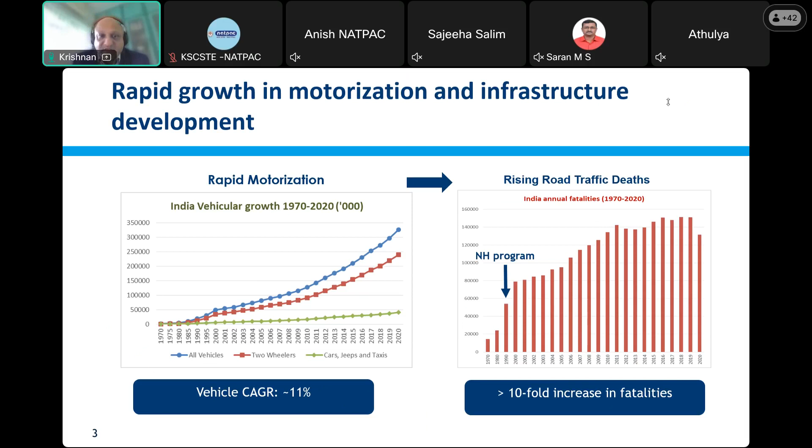Next, who, where, and why are these fatalities happening? Who are these victims, where are they, and why is it happening? We already talked about the why and who a bit. Almost 50%, almost half, are motorcyclists, about a fifth are pedestrians, and the rest, about 7%, are cyclists and three-wheeler riders.

Why? Primarily because our roads aren't built to cater to all road users—we design mainly for motorized transportation and not for other road users, causing these interactions, risks, and crashes. According to the Road Accident Report 2022, speeding is a big factor—more than 70% of fatalities happen due to speeding. And as I said earlier, two-thirds of victims are also in the productive age group of 18 to 45.

Many may not be aware that more than 4,000 fatalities on average are happening in our construction work zones per year, not crashes, fatalities. If you think about it, that's equivalent to about 10 jumbo jets crashing in a year in terms of fatalities.

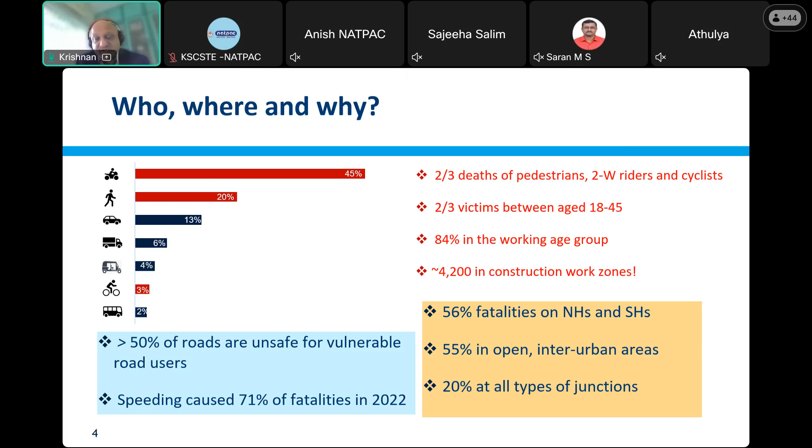With this kind of statistics, we need to think about road safety more as a system management challenge. It's not something you can do by doing one thing or another, but a complete system where you look at 5 major aspects: roads, users, the speeds they are subject to and what speeds are mandated on the roads, the types of vehicles let onto the roads, and the type of post-crash management in case of an incident.

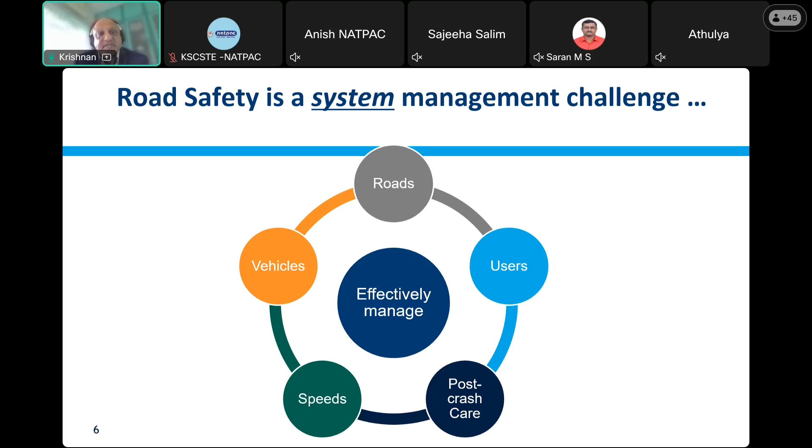All of these have to be effectively managed to deliver road safety. Unless all of these are taken systematically and done in a comprehensive manner, we cannot expect to reduce our road fatalities in the near future in a significant manner.

One of the good frameworks, which most advanced countries have followed and which has been pioneered by Tony Bliss and Jeanne Breen, requires a certain institutional setup with a very focused, mission-based approach to road safety—almost like a mission to space—where you say, look, I have 400 fatalities a day, and I'm going to reduce them to, let's say, 100 over the next 10 years.

So you need to have a results focus, and then you need interventions that will support that results focus in terms of three major areas out of the 5 that I showed earlier.

One is planning, design, operation, and use of roads. Then how do you control both users and vehicles in terms of their licensing and the roadworthiness of vehicles? And how do you account for post-crash care—how do you have a good system of recovery and rehabilitation of victims?

These will ultimately deliver results in terms of outputs—better roads, better drivers, better vehicles—and in terms of outcomes, both intermediate, such as increasing helmet wearing, or increasing the number of people following the speed limit or wearing seat belts, up to your final outcomes of reducing fatalities to whatever target you've set.

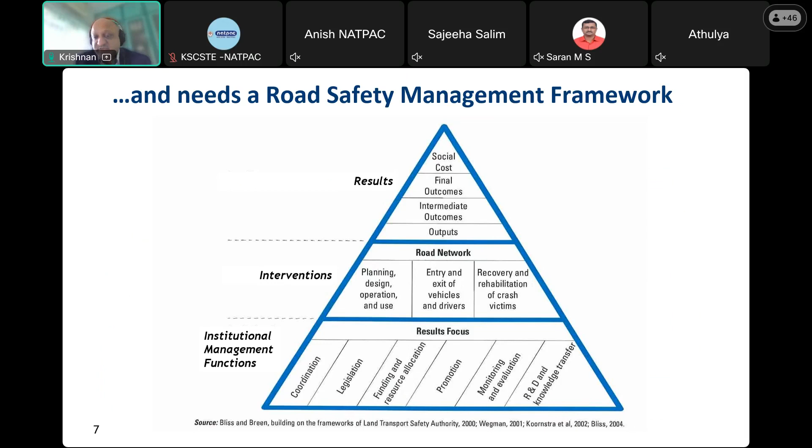So the rest of the presentation will dwell on how we are doing. If you can see on the top right, there will always be a kind of a pointer on where we are in terms of what I'm discussing.

If we look at the road network in terms of where we stand on aspects such as road planning and design, vehicles and drivers—on road planning and design, we have sound systems, very good engineers, more than 150 years of engineering experience, and very good standards and guidelines produced by IRC and NHAI and others. But there is little to no capacity for incorporating safety in planning or prioritization of roadworks.

For instance, to give a simple example, supposing there are two roads that are equally bad in terms of road condition, the road that has more fatalities should probably be taken up first for improvement. Whereas that kind of input is not currently there in our road planning and prioritization of roadworks. That should be the criteria guiding how we prioritize and plan roadworks.

That kind of connection between your road crash database and your road asset management systems, or the systems which let you prioritize roads for improvement, simply is not there. And highway standards are again tailored mostly for the safety of motorized transport, with very little for the safety of all road users.

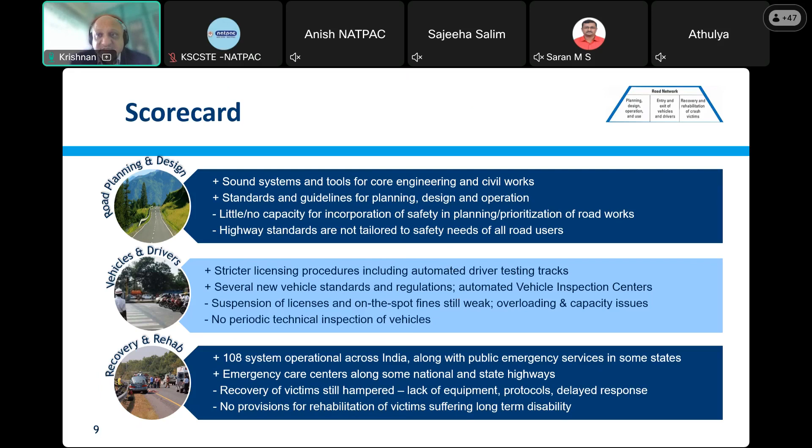So this is the scorecard in terms of the road network features, the entry and exit of vehicles, and post-crash care.

So what are some of the good things we can see in terms of institutional management functions? On coordination, there are national, state, and district road safety councils in place. Some state transport departments and cities, such as Chennai, have just started a road safety cell. State transport departments in Karnataka have a road safety cell, and I think Kerala also has one. Several states now have road safety cells.

Then on motor vehicles, in terms of legislation, the MVAA is there. There are also independent road safety authorities in Gujarat and Kerala. In terms of resources, funds are available for road safety and post-crash equipment by the ministry. Several states also have set up dedicated road safety funds from which projects are allocated funds for road safety activities.

Promotion is something that has actually been taken up seriously by every state and city, and even at the national level. Road safety weeks have been there, and road safety months have started from 2021. Several NGOs and corporates are involved in these kinds of campaigns.

On monitoring, the Supreme Court-appointed committee on road safety has been doing some of this in every state, looking at the number of fatalities that have been happening and the activities states have been doing. The integrated road accident database, IRAD, has also been set up. NHAI also had set up a rating system for highways which included road safety as a big aspect. IRAD should be a game changer if fully implemented, and it will help devise data-driven strategies and policies in every state. Research is also being done by several institutions, including NATPAC and other academic institutions.

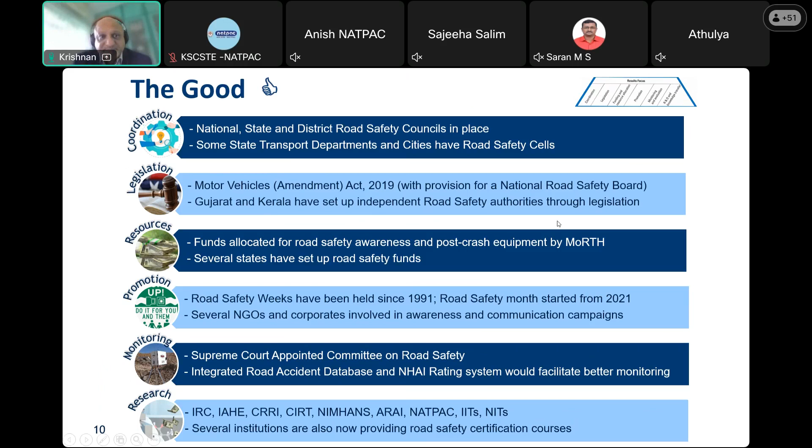But there are some areas for improvement. Specifically, if you look at the coordination issue, road safety councils lack a mandate, they lack resources, they lack capacity. Several state and district levels do not even know how to make a targeted action plan or proposals in terms of what to do about safety in a systematic manner.

On legislation, the Motor Vehicle Amendment Act is yet to be fully implemented in all the states. And in terms of having dedicated counterparts for the National Road Safety Board, very few states have dedicated agencies. Like I mentioned, Gujarat and Kerala have been pioneers in setting up road safety authorities, but other states are yet to follow.

Recently, though, Rajasthan has become the first state to actually have a 10-year strategy and action plan, which is also very good.

Resources, again, this is a constraint. Dedicated funds are not there for road safety improvements. There is no, and very importantly, even if the funds are there, the allocation of these funds for road safety projects is very, very weak. There is no kind of accountability of, okay, I gave you X amount for road safety last year. What happened to those funds? How have you actually looked at those districts or those jurisdictions? How have they done? Whether the fatalities have gone down, injuries have gone down, and what did they do? There is no mechanism to look at that and to kind of say, okay, now we can scale this up to the entire state, or we can have this as a best practice.

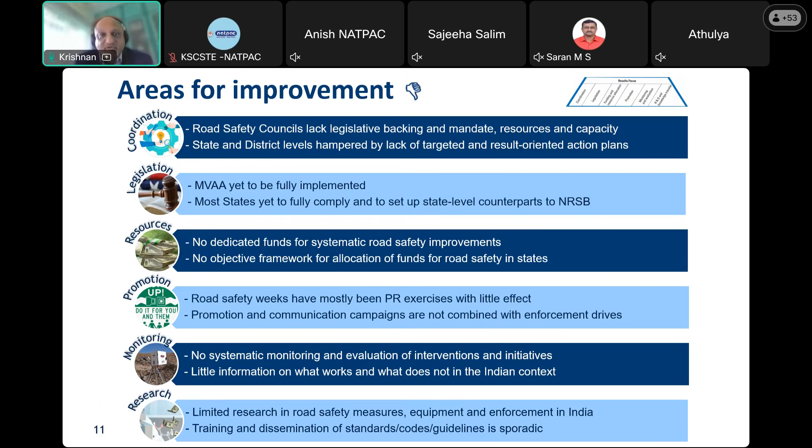So given that, what are some of the good examples, and how do we go about having good practices in road planning and design? Before we do the design, there are several prerequisites that we need to be looking at. So what are some of the climate risks in the area that you're planning the road in? What are some of the safety risks, proactively?

This can be done through several methods, including the International Road Assessment Program star rating mechanism of roads, which proactively gives you what is the risk on the road for different types of road users. And then the iRAP, if complemented with a road safety audit at certain areas where there is high risk, that needs to go in. Then these need to be supplemented and complemented by crash data on those segments, along with the crash data being integrated with your road asset management system data.

All these will then result in what are the standards that I need to use, and those standards will go into my design. So unless we do road design and planning in such a systematic manner, we are going to be seeing the same kinds of design and planning happening, which is a motorized vehicle mindset rather than a moving people kind of mindset on our highways, on our roads.

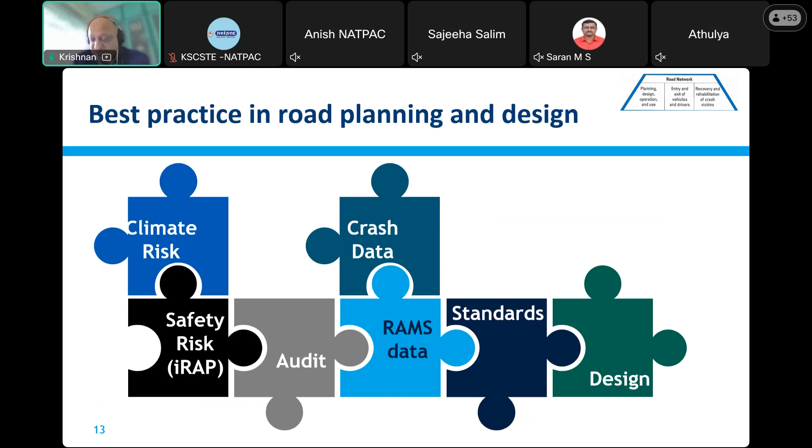So with that, let me quickly go to the two aspects that we as engineers can be looking at. What can engineers control among all the three big items in terms of the road environment? There are the road infrastructure, there are the users, and there are the vehicles. Out of these, I posit that the only thing we cannot control is users, because user behavior is something that is very much driven by human whims and fancies. Vehicles, again, is not in the control of the engineers, the engineers who are in the public works departments and who design our highways. So the only thing that we can focus on, that we can do well, is road infrastructure.

So we should be designing our road infrastructure in such a way that the available behavior, that means the behavior that is available to the users, is actually the right behavior. With that, what I mean is, let us take a very simple example.

This is a very basic example, but on several of our roads in the cities, when you put a speed breaker, there's a little bit of a gap between the speed breaker and the curb, for water to go through. But most two-wheelers and some four-wheelers try to avoid the speed breaker by taking that gap.

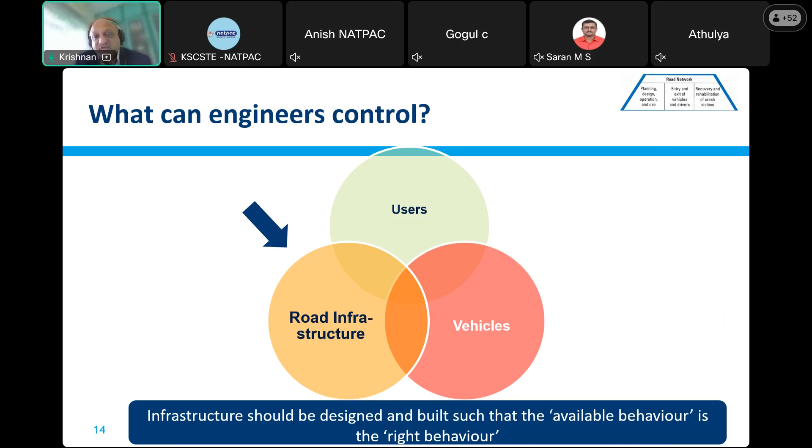It has been shown that even in advanced countries - let's take Australia, by the Australian Road Research Board - that they found with just infrastructure design improvements: the left portion of the graph shows a normal designed road, and the right portion shows a safe system designed road. You can see that your percentage reduction in fatalities goes from just 20% in normal design to 50% in a safe system design.

That is not in developing countries - this is actually even in advanced countries, they found this is an issue. And of course, if you add better enforcement, better vehicles, and better post-crash care, you're going to improve that even further, maybe much higher, like other countries have done, such as Sweden and Australia, New Zealand, how they've gone up to more than 50% reduction.

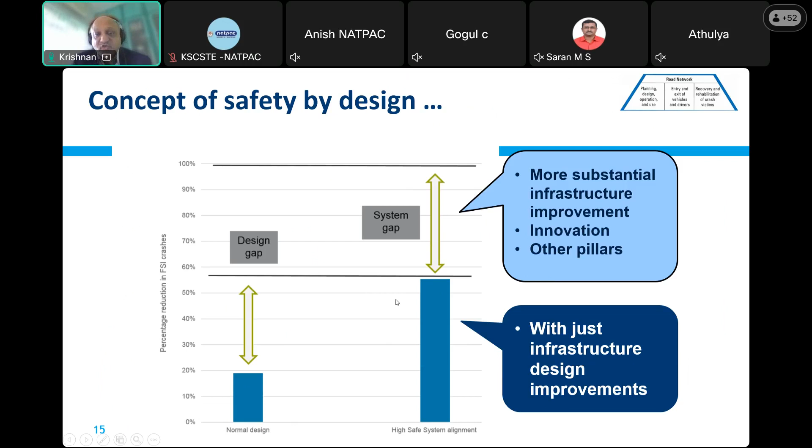So this is something doable. We need to have good design to avoid things like this.

This is a road, NH8 bypass, which has actually severed a local road near Jaipur. Look at the cyclists and the people who are crossing. This road has been cut in half by NH8, and because they don't have any access, they're actually forced to cross the road. With a high speed NH8, you can imagine the kind of fatalities that are going to happen on this road. This is basically due to faulty design.

So what is required from the roads perspective? From what I have seen, we need to have better standards, and we need to update these standards to incorporate road safety requirements into the design of our highways and urban roads.

We need to recategorize our road types in terms of link and place functions. How people are using the road in India is very much different from how they use it in the US and Australia. And we need to think about those and set safe speed limits on our roads.

Similarly, we need to have uniform performance metrics and policies on road projects, and how we actually measure performance of highways. It needs to incorporate a big safety component.

We need to have a big time capacity building program. Right now, I can tell you that for a country like India, we need about 20,000 road safety auditors. We probably don't even have 500 - even 500 is a stretch, I think, right now. We have probably the second largest road network in the world, but we do not have the kind of people who can audit those roads and tell you what is wrong.

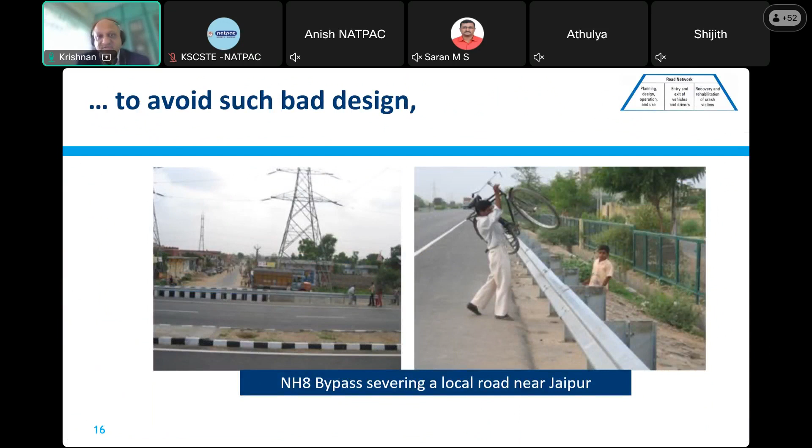So here, the design of roads I was talking about - to avoid this kind of design, or look at this kind of design. This NH44 in Telangana state, this is called the highway of death.

This road - you can see this small village path meeting this road from the left - and this village has lost all its 37 male occupants because of hit and run crashes while they were crossing to reach the village administration on the other side. The residences are on one side and the administration on the other side. There is one widower, because his wife walked across and got killed while crossing this road. This is the kind of design that we should not be doing.

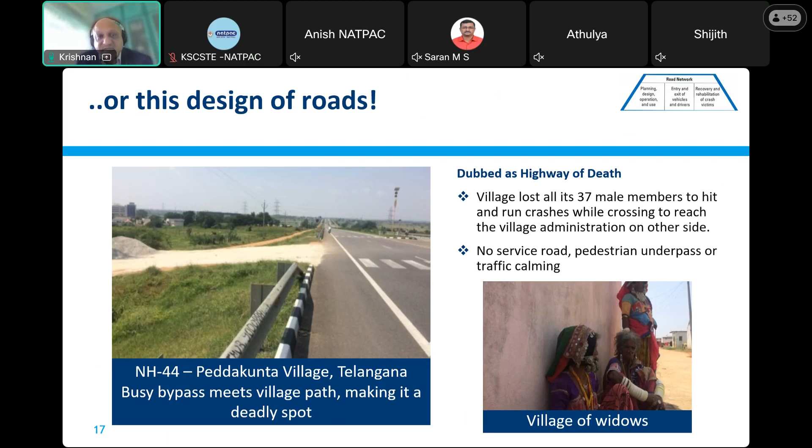We should be providing pedestrian underpasses, ways for people to cross to the other side. We need to think about basic things when building highways, rather than just thinking about intercity traffic or looking at it from end to end. We have to be looking at what communities and villages are affected, and this is not happening in a comprehensive manner in our country right now.

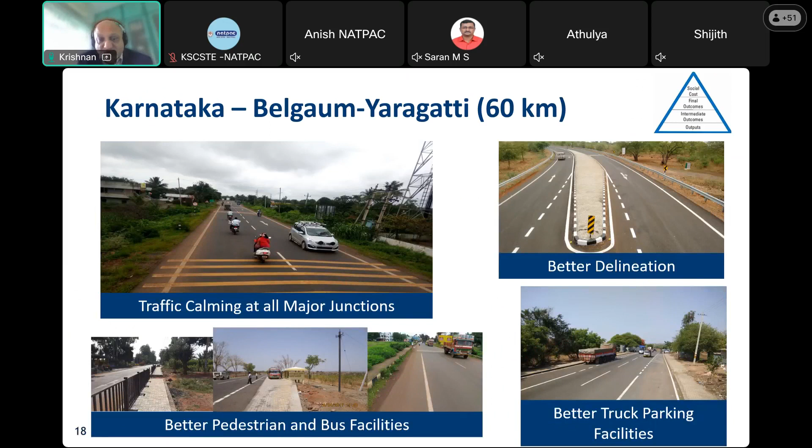Some good examples are from some of our World Bank projects in Karnataka. You can see it's a very simple 2-lane highway, but traffic calming has been given at major junctions. Better delineation is there. There are better pedestrian and bus facilities, and better truck parking facilities. All these need to be thought about when roads are being designed and implemented.

This has reduced crashes by more than 50% on this highway in Karnataka between 2015 and 2018. So this is a success story.

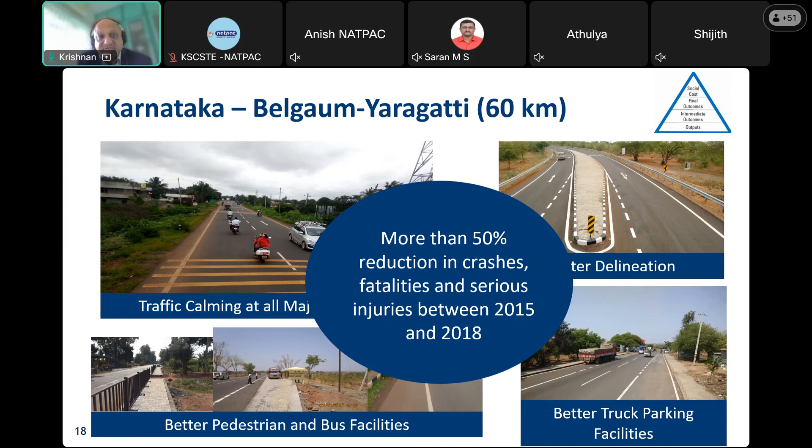Similarly, on the Kerala State Transport Project, several innovations have happened. You can see, for the first time, the zigzag kind of marking, which is to alert users and drivers that they are entering an area with a lot of crossings. Also very interesting, on the top left you will see the marking on the road going from slow to stop, and this is actually taken from AASHTO, not IRC standard - they've gone beyond and implemented something from AASHTO, which is very good to see.

This is another point I wanted to make - what is happening is our IRC guidelines and codes are taken as the gospel, as something we cannot go beyond, but that is untrue, that is not correct. What the IRC code says are the minimum that should be done. You can always go beyond the codes if something is better done in another code, like an Australian code, or US AASHTO, or the UK code.

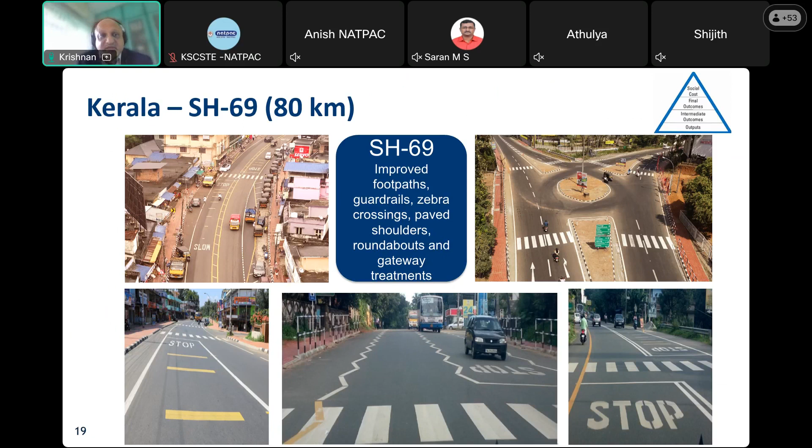Then we should be adapting and taking those, like Kerala has done. This is really good to see on some of our projects. Tamil Nadu again has done a very good job on some of the highways - you can see very good bus stops with even access for wheelchair users.

Very interestingly, in Tamil Nadu, it was in the contract that the contractor, whenever they did the highway, also had to improve up to 100 meters of the minor road in terms of safety and all the features. You can see that in the third photograph on the bottom.

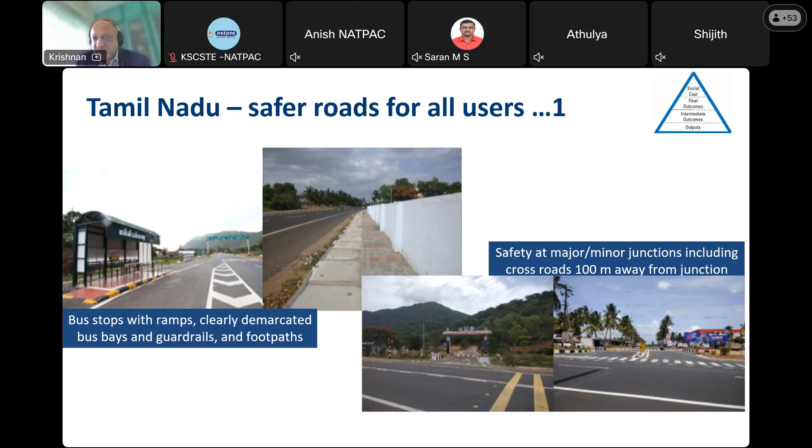So, safety at major junctions, you can see some of this. Again, this is more pictures from Tamil Nadu in terms of proper safety treatment at highway sections in built-up areas.

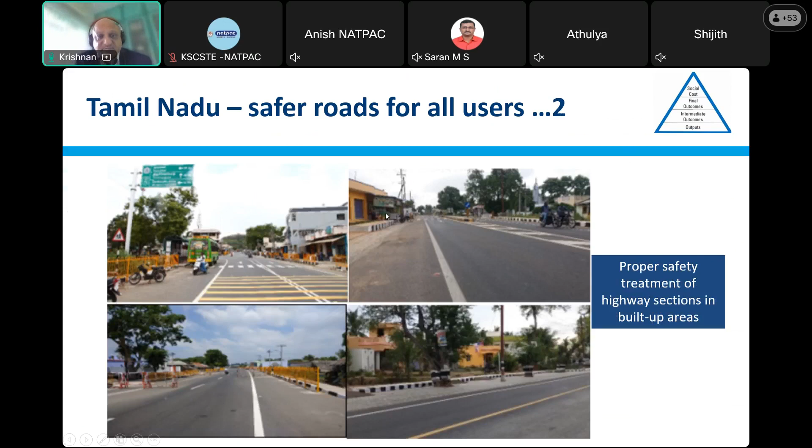Again, some raised pavement markers, center and edge lines, and interestingly, hazard markers and chevron signs. But these edge markers are something rarely seen on our roads, and I think we need to look at having an audible alert for drivers, so that when they get too close to the edge, especially on hilly roads or in Kerala where there are mostly 2-lane highways, we need to look at this.

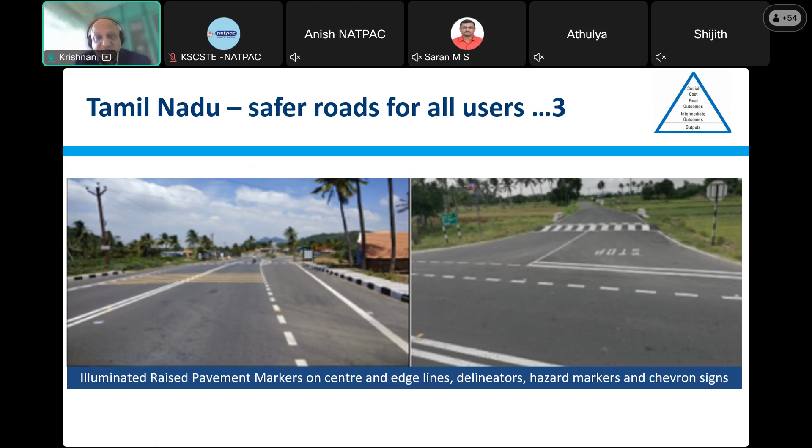Here, protection of any kind of hazard or road safety feature, whether it's a signal, a signpost, or anything, it has to be protected from the road by a crash barrier. It should be behind the crash barrier. So, very well done here, again in Tamil Nadu.

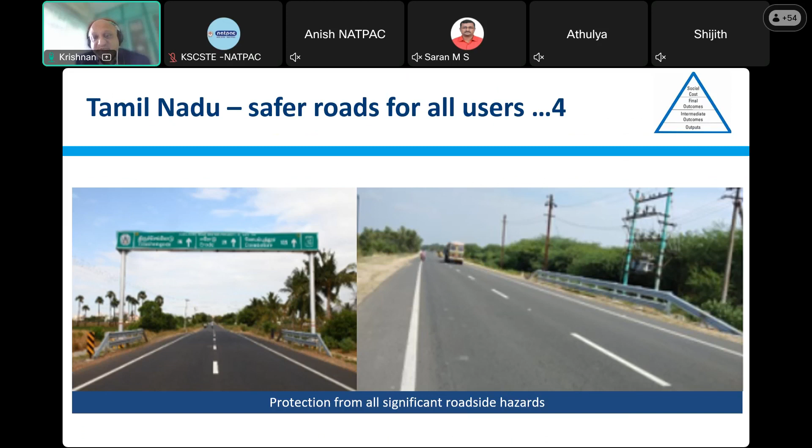Punjab is one of the best things we've seen, and this is quite old, but what they started very early was a consistent application of standard layouts and treatments, which is very important, because as a driver you don't want to see any surprises. Driving is already a tough proposition on our roads, and with that you don't want to see different kinds of layouts and treatments.

So you can see rumble strips, and one of the things I would say is look at our speed breakers. I think we are not consistently applying these speed breakers, and that is why a lot of communities are against them.

But if you actually look at the IRC code, there are very good guidelines on what speed, what height the speed breaker should be, what the geometric features and slope should be. Everything is given, but we are not doing those according to the guidelines. So no community wants to see speed breakers, with the result that you're exposing a lot of non-motorized road users and pedestrians to high speeds and high risks.

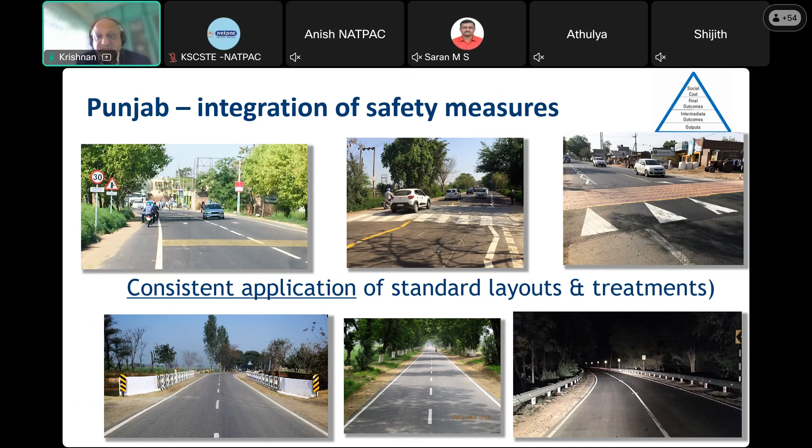So finally, I wanted to come to, very importantly, work zone safety, which is very close to my heart, because this is something where there is purely negligence. 4,000 fatalities happen in our country only because of work zone safety. This is unacceptable, and we need to be looking at this.

And this is completely in the control of the highway agencies, because they can pull up the contractor, they can pull up the authority engineer, and actually impose penalties when some of this stuff is not happening. So what is happening on work zone safety? The compliance to the codes is there only in letter and not in spirit.

I have seen several roads under construction in my experience in India, and there are very few advance warnings of road closures. What is the length of road under construction? What is the alternate route? Signage is completely inconsistent, not as per standard, confusing the road user. The advance warning signs at most places are just placed right before the work that is happening.

I can show you some examples of how this is done well, even in India, in some places where they're trying, which is very nice. But 95% of the time, this is not being done.

Hard crash barriers are missing, and this is basic. You don't need to be a civil engineer to know that you need to put hard crash barriers on several valley side sections of roads, and this is causing a lot of fatalities on our hill roads.

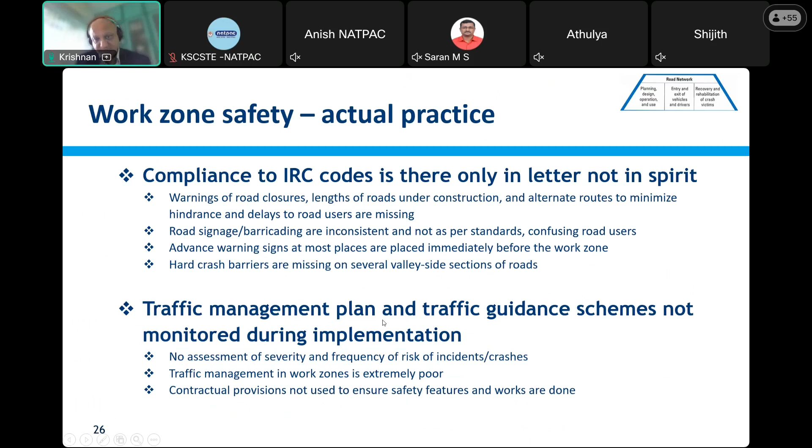And I can show you some of the pictures. On the left you can see what the standards are, on the right what is practice, and the sign is placed just before the hazard. This is the case everywhere.

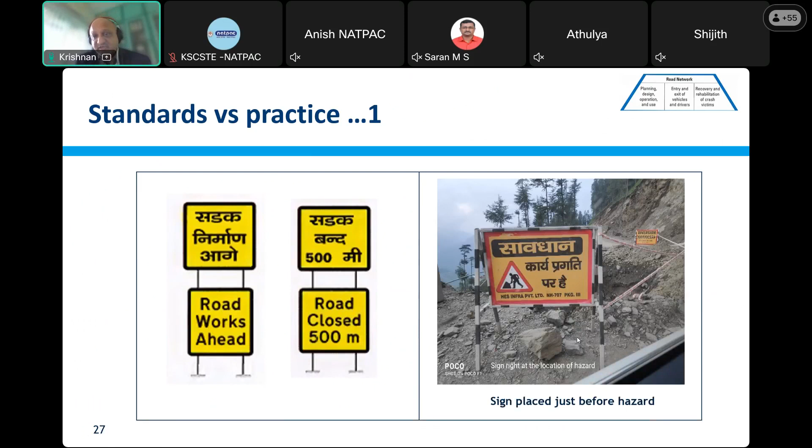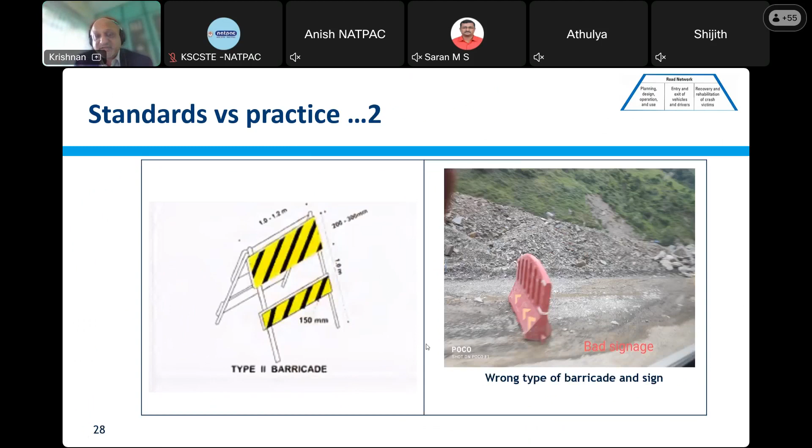Next, you see the kind of barricade that we need to have, and the kind of barricade that we are having, with poor signage. This is placed where somebody could fall. Imagine you're going at night and suddenly you come across this - it's going to cause an incident right there.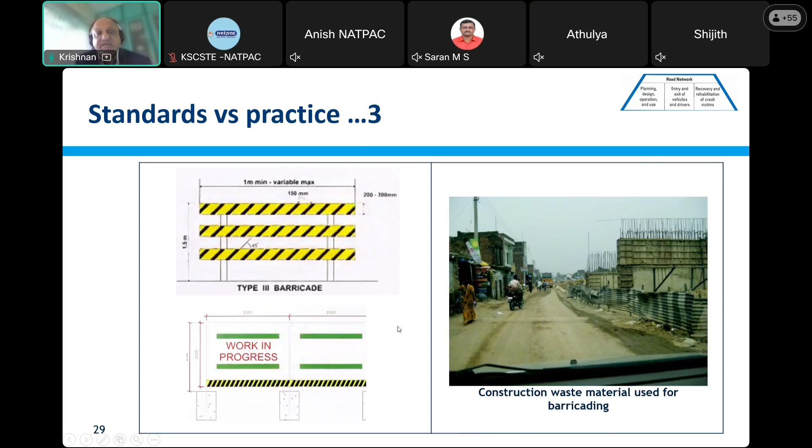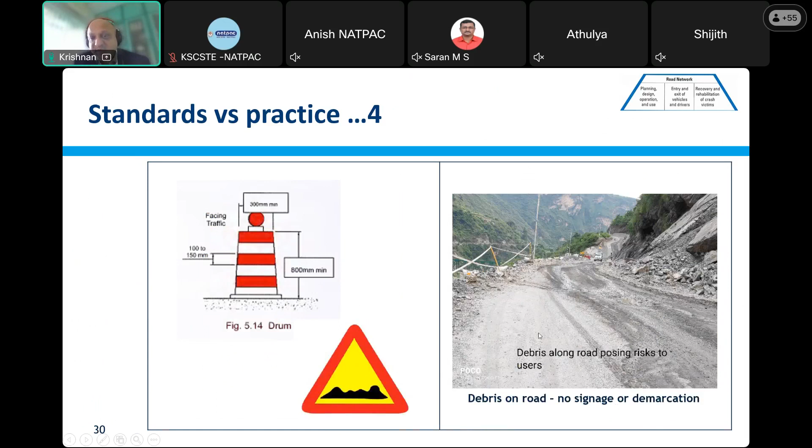Similarly, in terms of barricades, we all use some kind of jugaad material, waste material used for barricading. But what is actually recommended is very clearly given in IRC. Again, there's no signage or demarcation of what is happening in terms of work zone, and debris on the road - construction debris - which is going to make your vehicle skid, and look at the protection on the valley side. So again, water-filled barricades are given in the IRC code.

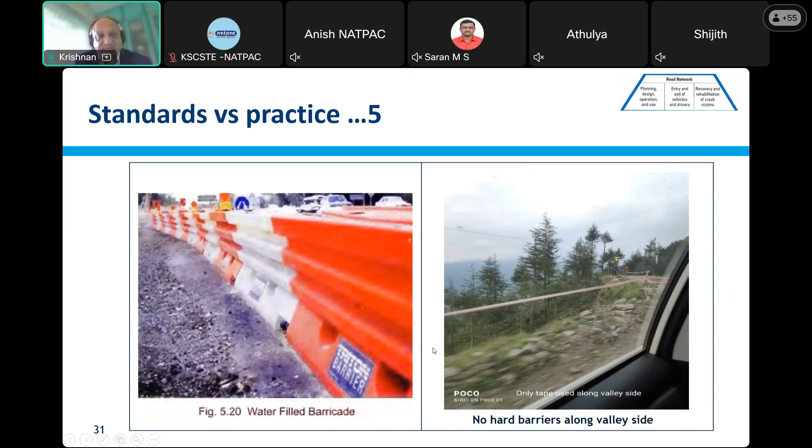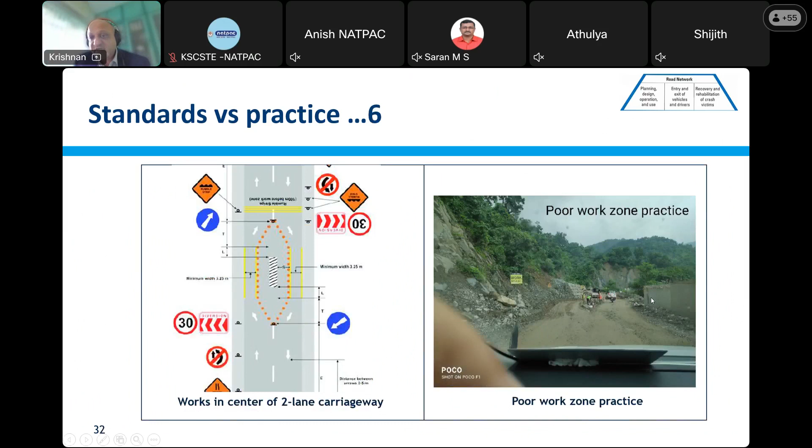No hard barriers, like I said. This kind of traffic management plan is given in the IRC for works happening in the center of the carriageway, and look at what is happening on the right in terms of actual practice.

So what is required is you need to look at the risk in terms of what is the frequency of a crash that is happening, and what is the severity of that crash. Unless you look at these two aspects and then proactively have a traffic management plan, you will not be able to control some of these and have the right features for the work zone elements in place.

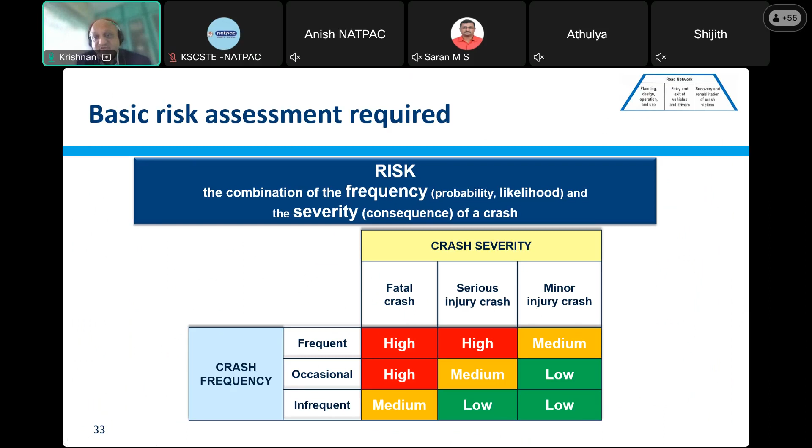So if we apply that framework, for instance, take the sign in front of the crash barrier - this is a hazard. You need to look at how to control it, and if there is no space, you need to either mark that with retroreflective tape.

I think on some hilly roads it might be a problem, or then try to even have it in a slant manner on the other side, not exactly straight. So you need to look at ways to avoid any kind of roadside hazards. So the best practice is to place the sign behind the crash barrier wherever possible.

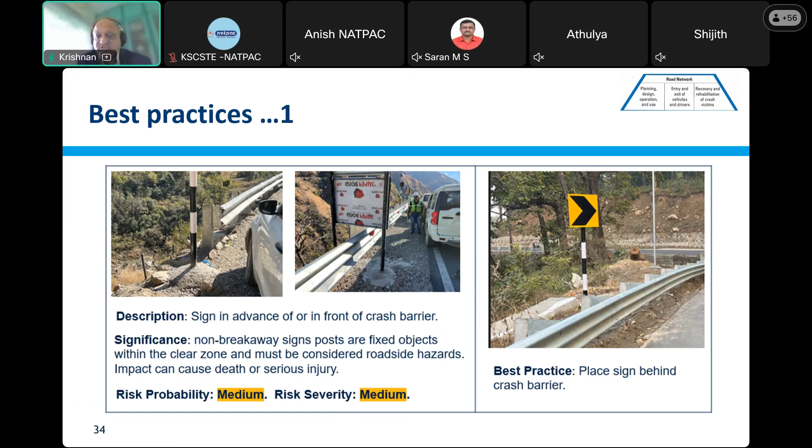Similarly, reflectors have the same issue. These can actually be mounted on top of the spacer, as done in several countries. In fact, on the outer ring road in Hyderabad, they're doing this wherever there's no space. So I think we need to be looking at those rather than leaving it as a hazard, because if it is struck, it may actually cause injury.

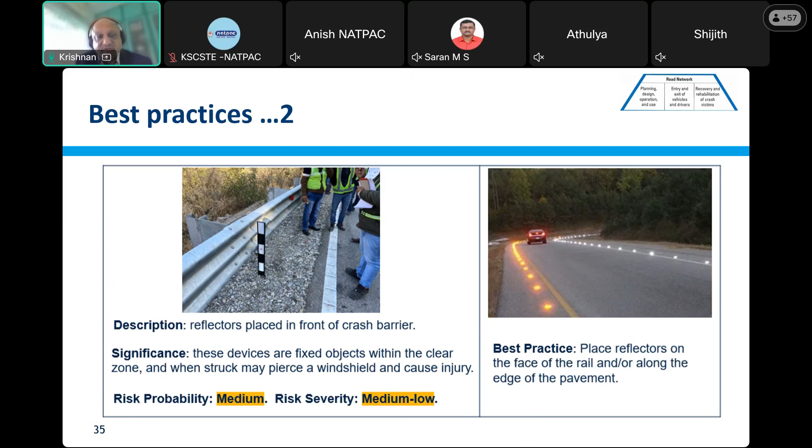And the other thing is to also have these white edge markings. Those are also really good to have, because they will actually alert the driver. And there are several gaps sometimes in crash barriers to allow access.

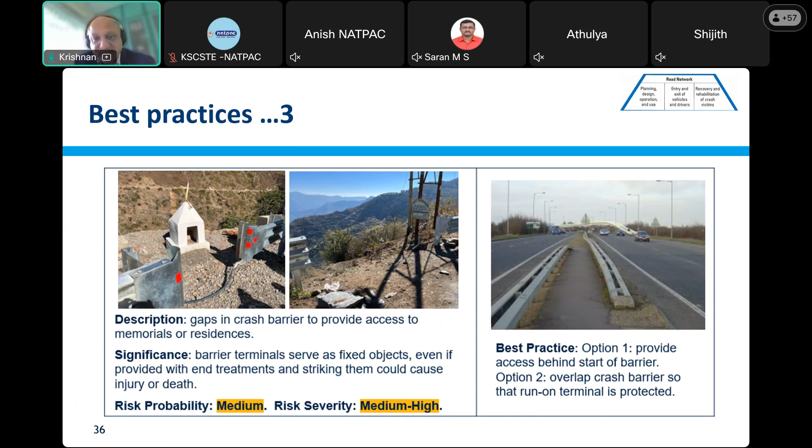If you look at those two aspects and try to devise accordingly - similarly, several roads in Himachal and some of the northeast areas, look at the risk probability. I mean, look at this - is the tape going to stop a vehicle from falling over? No. So there's extreme risk probability and extreme severity in case there is a crash.

So you need to have water-filled barriers along the valley side to prevent such crashes from happening.

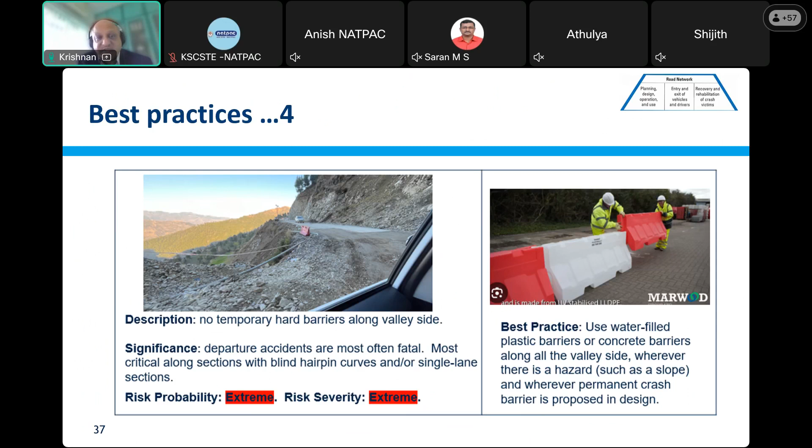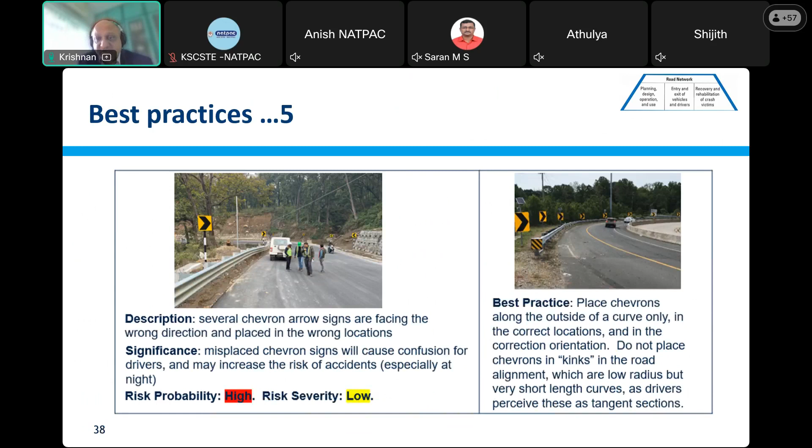Sometimes it's just the wrong type of placement of chevron signs, but it could confuse users. So you need to be careful about that.

Similarly, debris left on the road or on the side after construction. You need to make sure those are not going to fall and become risks for road users.

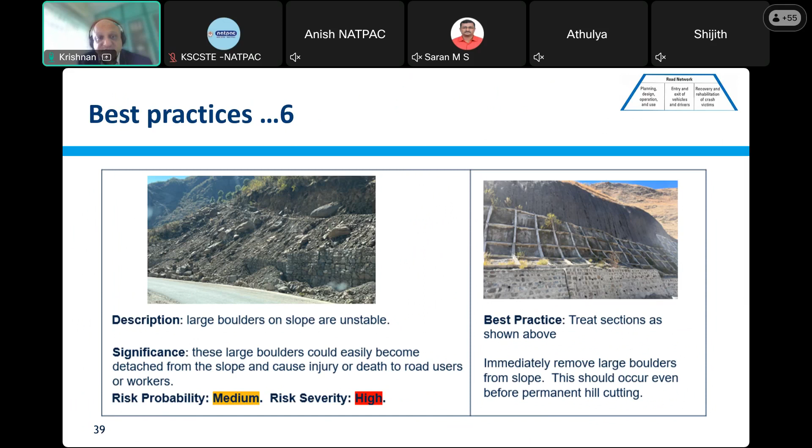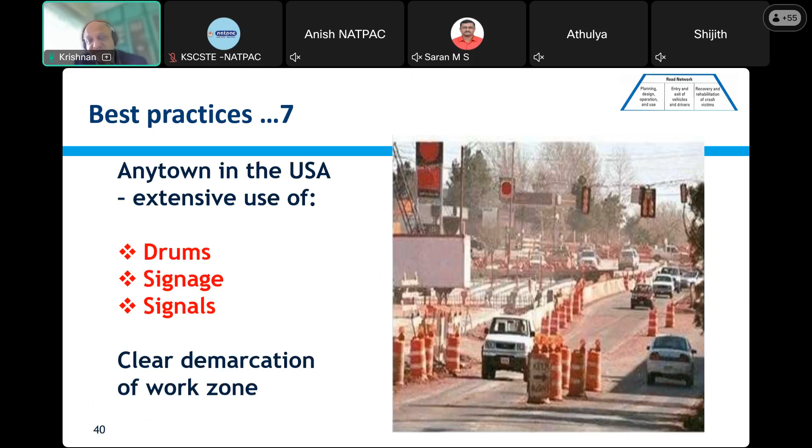So some of the practices, if you look at this, I think this is the Central Artery Tunnel project when they were doing work in Boston, way back maybe 25 to 30 years ago. Look at the type of signals, they have drums. It looks very confusing, but actually with the placement of the drums and everything, it's very clearly demarcated in terms of what is the work zone and where people need to travel.

Similarly, look at the kind of demarcation in one of the sites in Colorado. You see, the speed limit sign comes first, and then there is an arrow indicating the road is going to become one lane closed, and then you need to move. So there is actually a transition that you need to follow.

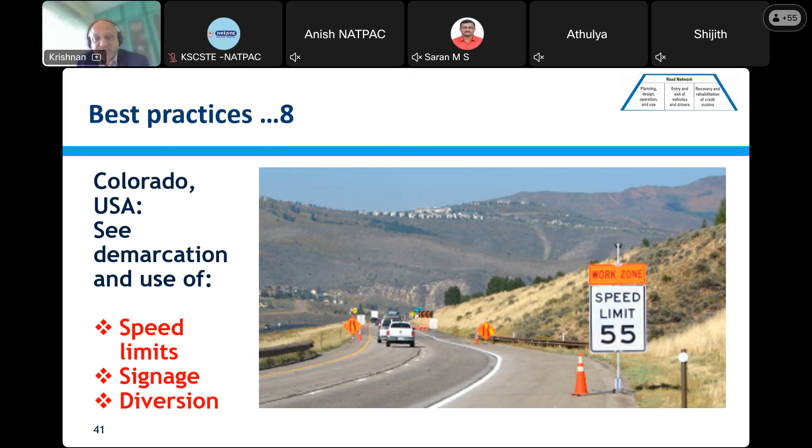Look at the kind of demarcation used in terms of speed limit, signage, and diversion here. Similarly, look at how many times they're telling you: road construction is happening 1 mile ahead, half a mile ahead, 1,000 feet ahead. This is the only area where you need to have more signage than less in terms of work zones. You need to inform users, even if they miss one time, that the second time they know, okay, I'm going into a road construction zone, so I need to be careful.

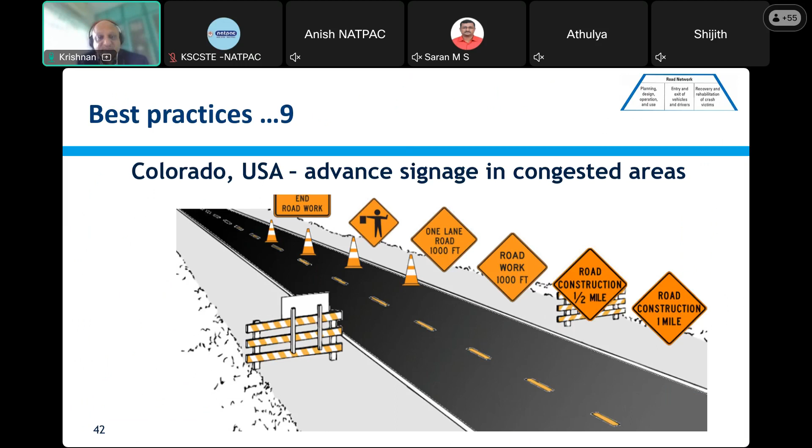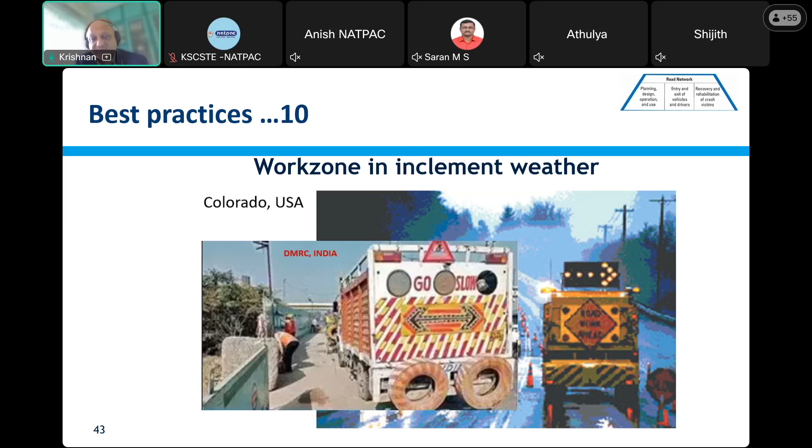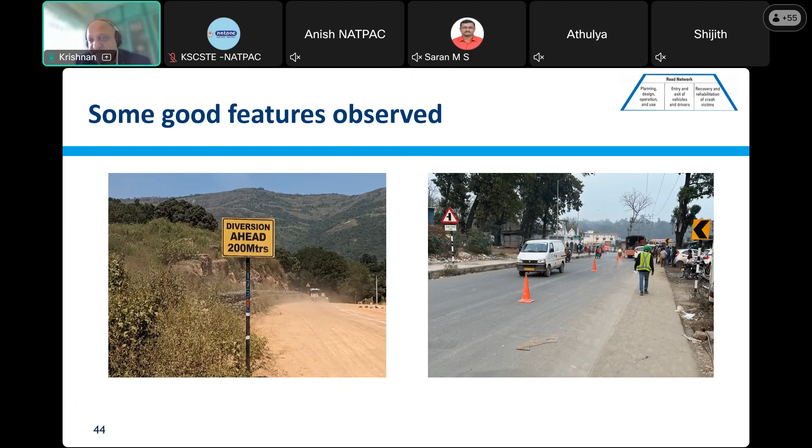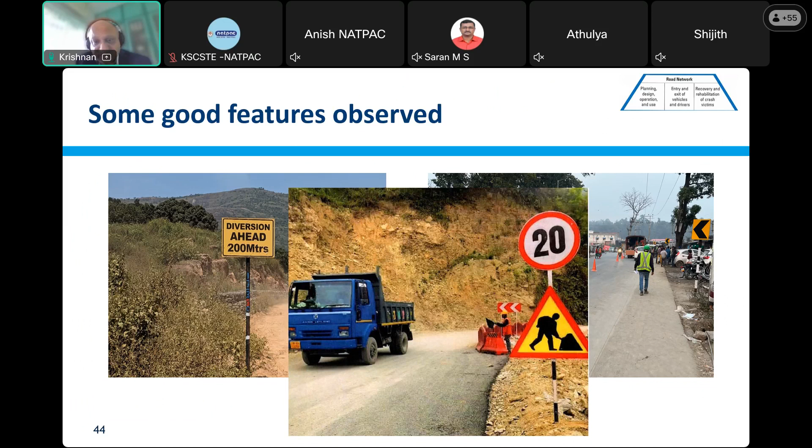So some good features we observed on some of the roads. I saw a sign on one of the highways, I think either in Himachal, or one of the roads in AP, near Araku - a diversion ahead sign, with good demarcation using traffic cones on the right. Similarly, look at this, good use of signage on NH 707 in HP, saying the speed limit is 20. Again, this is good demarcation on NH 707. So these are some good examples.

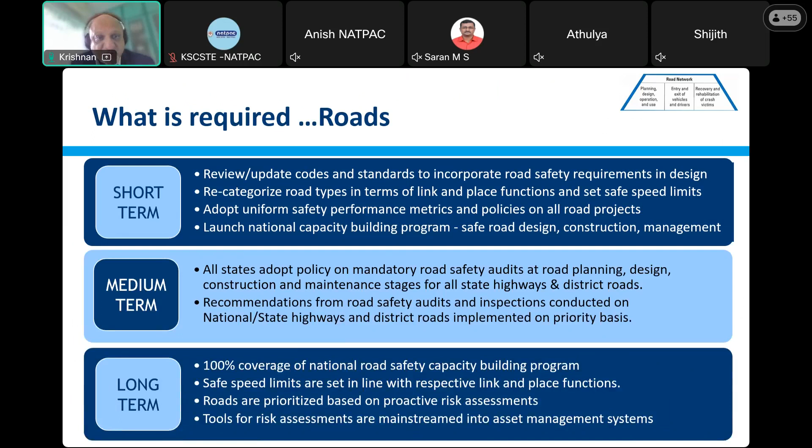I already talked about what is required in terms of roads. In terms of road safety management, I mentioned earlier, 20,000 road safety auditors are required, hardly 500 are available. There's limited research and training. All this we've talked about.

The thing is, we have very good technical capacity. Our engineers are excellent, we don't need to teach them engineering or civil engineering or transportation engineering, but we need to sensitize them to the fact that roads are for all road users, and we need to ensure people provide those kinds of facilities for all kinds of road users, not just highway users, not just vehicles and heavy vehicles and motorized vehicles.

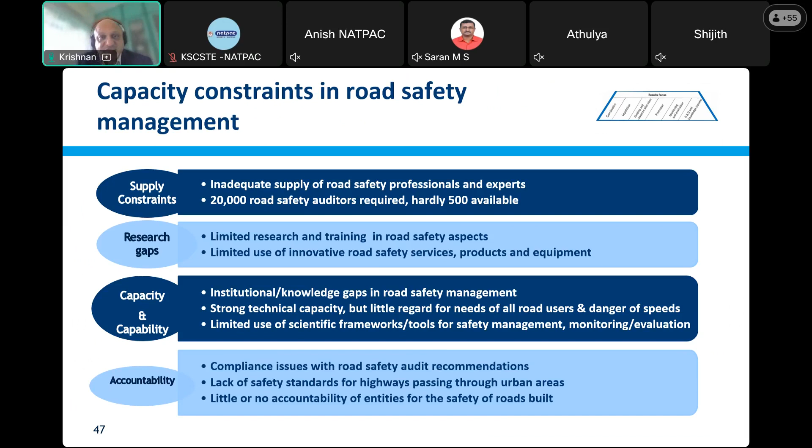I don't think I need to go into most of this, we have talked about it. Some of the reasons we need better provisions is because the Motor Vehicle Amendment Act now actually has an accountability framework. Any entity, whether it's a road agency, a concessionaire, a designer, design consultant, or authority engineer, whoever is involved in building, constructing, maintaining, or operating a road, if it's determined that a fatality or something happened because of some kind of flaw on their part, there are now provisions to hold them accountable, which was never there earlier. Now this has been brought into the act.

Similarly, the act now actually permits electronic enforcement, and it should be done, especially on all roads, including in urban areas. So there is a mandate now to use ITS, and we should be using that more and more, especially for enforcement.

I don't need to talk about codes, we talked about this earlier. Road asset management systems - I'm a big proponent of combining these with road crash data systems for prioritizing and identifying which roads to be picked up for improvements. Finally, we need to be embedding safety into contracts with strict penalties for non-compliance within a time-bound manner, and independent road safety audits of all designs.

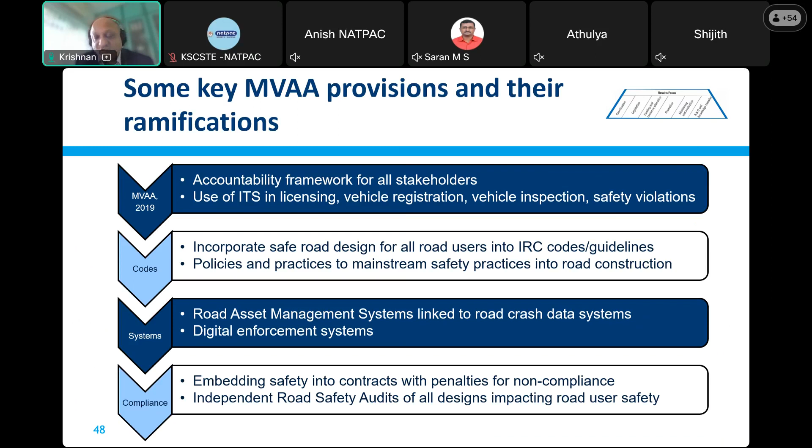So from a management perspective, I think it's very good to have fully empowered, dedicated agencies like the Gujrosa or the KRSA for road safety, covering all aspects of road safety management in that particular jurisdiction.

And I think you need to have very good high-level committees. Tamil Nadu has had very good road safety executive leadership groups which actually monitored road safety in the state, and they have done a superb job. Another thing they've done is earmark a portion of all construction contracts - their core road improvement development program - I think 2% they allocate for road safety and incident management. I think that's something also to take a leaf out of.

Then road safety action plans - as I said, very few states have good road safety action plans. Rajasthan has recently started a very good one, but these need to be very simple documents.

So just to give you a flavor of what they should have, the road safety action plan for Chennai, which they adopted last year, has these 8 kind of features. Their main outcomes are 50% reduction in fatalities by 2030 and 25% by 2026.

And then supporting those, they actually went into, okay, what do I need to do? My roads should be at least 3-star for all road users. I'm going to have 50% reduction in vehicles exceeding my posted speed limits. I'm going to have 100% of motorcycle riders correctly using helmets. I'm going to have 100% adult and child vehicle occupants using seat belts, 50% reduction in drivers who are driving drunk, and 25% reduction in time to first professional.

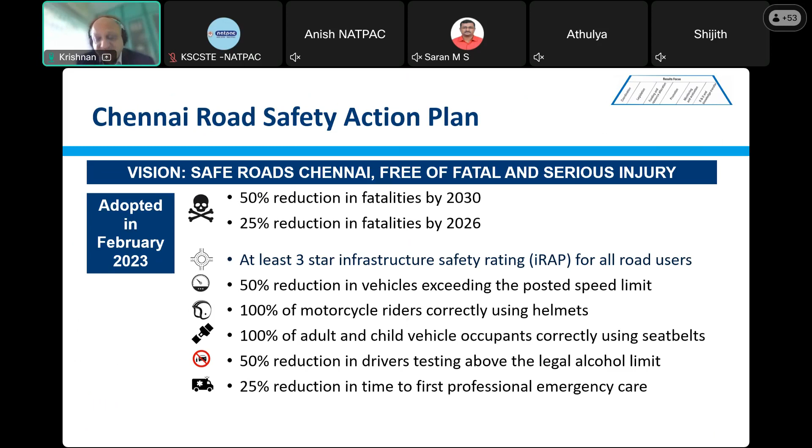But you need to have a very crisp action plan that you can then detail out using lots of data from your road crash databases and whatnot. So again, in the medium term, centers of excellence - there are lots of institutes doing different things. We need to establish maybe at least one center of excellence in each state to delve into this research and training on road safety.

Then, as I said, IRAD has to be used to devise road safety strategies and programs - it needs to be data driven. All the Chennai Road Safety Action Plan is completely data driven. They looked at the crash data, completely analyzed it, and took their own data - not from IRAD, but from their road accident database management system. They thoroughly dissected it in various ways, and then came out with what they need to do. That's how they said, look, I need motorcycle compliance, I need speed compliance. These are two things they said we need to do, and the police are actually now trying to do that.

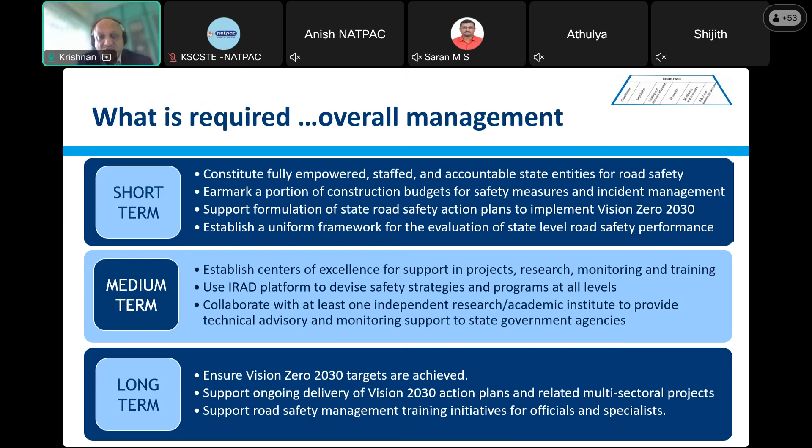And long term, we need to be looking at some kind of monitoring to say, okay, how do you ensure that your targets that you envisage are actually being achieved, and that your projects are supporting your 2030 action plan. And of course, road safety management has to continue over a period of time - I already showed you this.

So I don't want to delve too much on this because my talk was more about engineering and management, but because road safety environment also needs users, I thought I would give a little bit of suggestions on what should be done.

So in terms of users, the only way it works is, like I said, one is infrastructure that makes people do the right behavior, and second, if people are continuing to flout that, then you need effective and proactive road policing programs along with these campaigns. The campaigns by themselves will not work. The policing, the enforcement along with campaigns will work, and this has been shown to be the case in several countries.

We need to establish good policies on digital enforcement and, very importantly, crash investigation. We have no capacity in crash investigation—there are only 1 or 2 firms in the whole country which do crash investigation.

We also need policies on how to set speed limits. For the most part in our country, speeds are set haphazardly without any thought of link or place function. Unless you set speed limits properly, people are not going to comply, and if people do not comply, you're going to have crashes.

Similarly, we need speed management measures in all the million-plus cities. We need to implement more digital systems for on-road issue of penalties, and safe system speed limits. These are things we need to be doing in the short, medium, and long term.

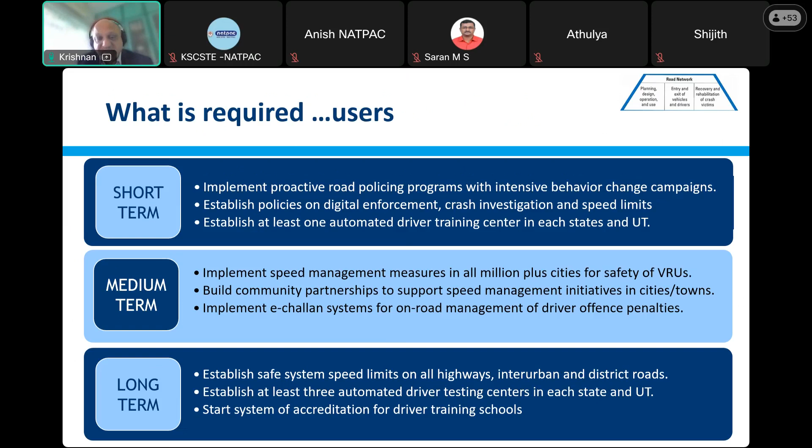Finally, we need a good system of accreditation for driver training schools. On vehicles and drivers, I won't go through this again, just to say we need a periodic system of technical inspection, and modern automated vehicle inspection centers which can automate the certification of fitness of vehicles.

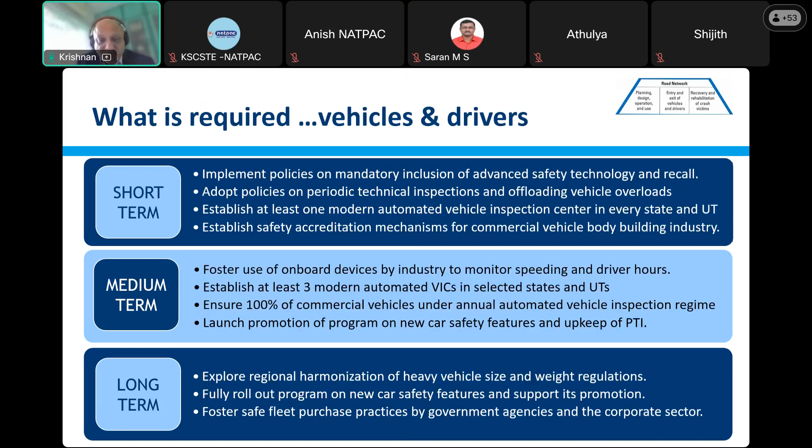On post-crash care, some of this has already been done. Cashless treatment of crash victims is happening in several states, and the ministry is seized of it. There's also a Good Samaritan law, now being implemented in several states.

One thing we need is fully equipped and staffed trauma care centers in all cities with population more than 1 million. Tamil Nadu has done well with their accident and emergency care initiative, TAEI, establishing several centers along with the private sector on some of their highways, which has led to a reduction of fatalities in that state.

In the long term, we need to look beyond rescuing and medical care to what happens with long-term disability, because most of these people get thrown into poverty. We need to look at how we avoid pushing crash victims into poverty as well—but that's more long term.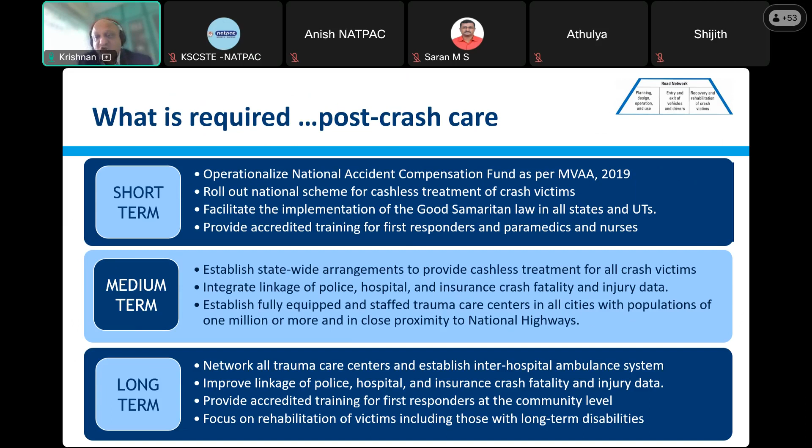One thing that can be done immediately is linking all the police, hospital, and insurance crash data. The provision is there now in IRAD, but the proof will be in the pudding. Unless it is linked, you need to triangulate the data to get good crash data from several sources—otherwise we won't be able to pinpoint the actual problem, and we'll end up spending money on areas where we shouldn't.

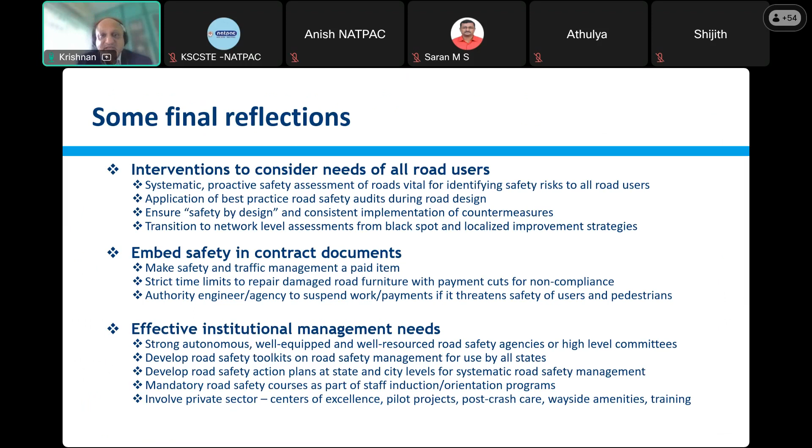Finally, I think road safety is everyone's responsibility, from the user to the highway agencies to everybody in society. Unless we take it up, see something wrong, and voice our opinion in the right areas, we will not be able to solve this problem where we are killing more than 400 people a day. Thank you, and again I thank NATPAC for giving me this opportunity, and I hope this is useful for policymakers and others on this talk. Thank you.